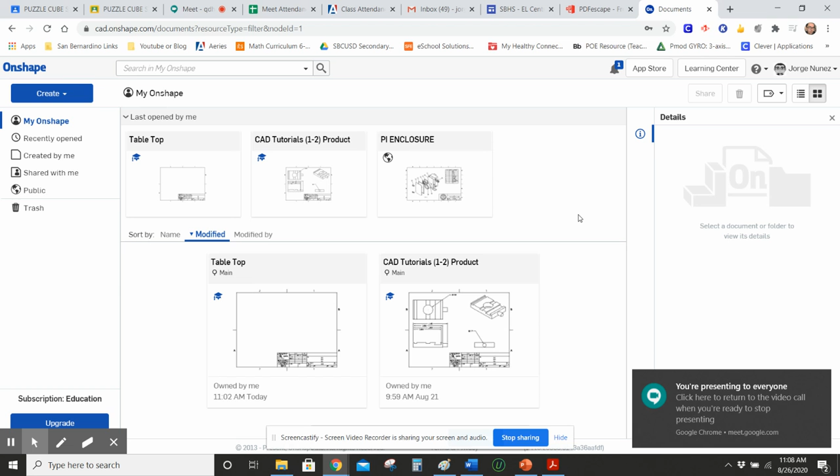I'm going to go to create document, and call that document toy. Inside of this toy, we're going to have a bunch of different part files. So let me create the first part, which I'm going to be sketching. I'm going to do it on the front view, right click and select view normal to, select the sketch, and have the front view be the sketch plane which is already there ready for me. The first thing I want to do is just make a simple rectangle.

I'm going to make a rectangle corner to corner. Doesn't really matter where you drop it right now because we can dimension it later. If I click on the dimension tool, the top side of this rectangle I'm going to make 4 inches, and the left side of this rectangle I'm going to make 2 inches. There we go, so there is my first little part.

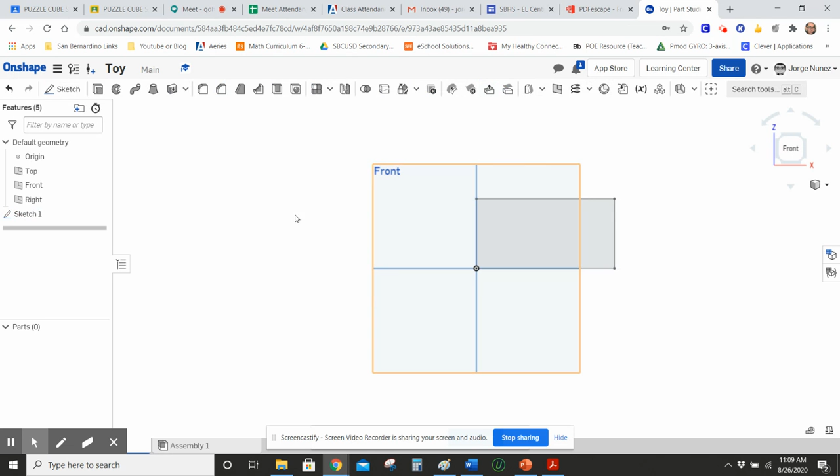I'm going to finish the sketch, and then extrude this by selecting that face. Let me show you guys the isometric view. The amount I'm going to extrude is 0.5 inches. Okay, so there we go, first piece is already done.

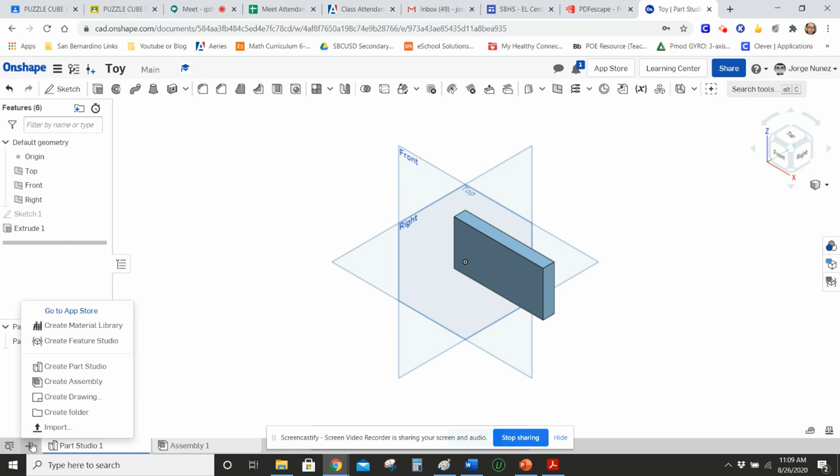Now let me create a second piece. On the bottom left-hand corner, I'm going to select the plus sign again, create another part studio. Same exact thing - I'm going to select my front view and draw on it, select view normal to, and sketch on that front view which looks like it already did it for me.

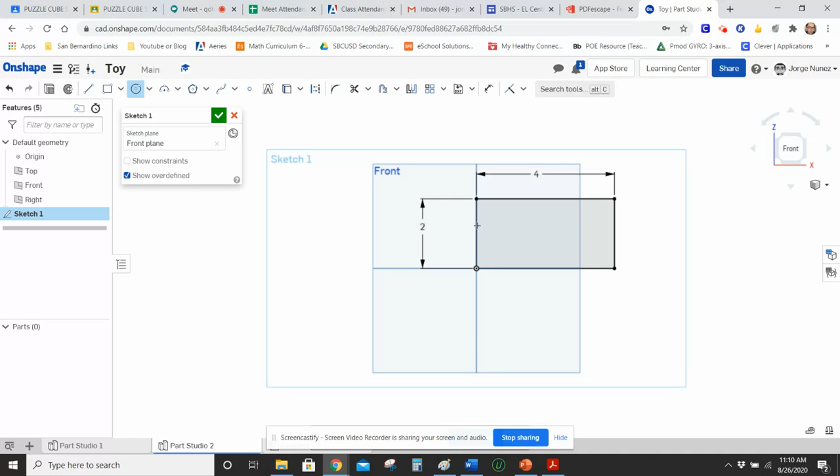I'm going to make another rectangle, same thing I did last time, starting at the origin. You can worry about the dimensions later. I'm going to make the top one again 4 inches, and the left side again 2 inches. Oops, I don't think I liked it. There we go. The only thing I'm going to make different this time is I'm going to make a little hole in the middle.

So I'm going to make a circle with a hole in the middle, and make that diameter 1 inch. I'm going to change the diameter of that to be exactly 1 inch, and now I have a hole in the middle.

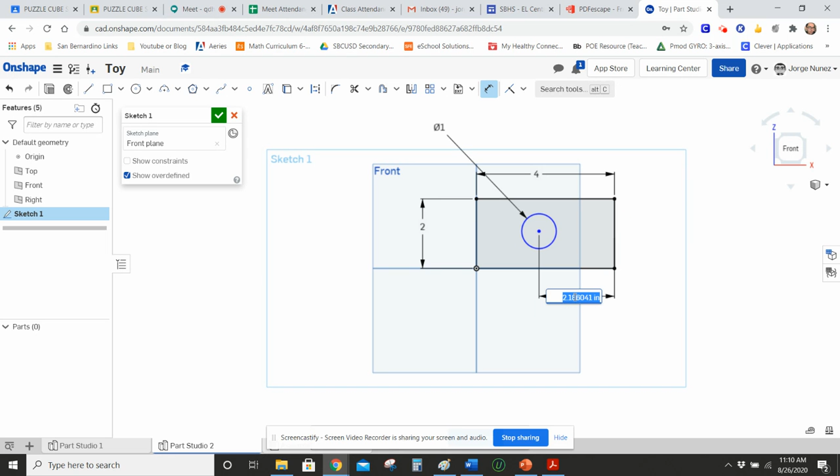I'm not done yet though, because I want to put that hole exactly in the center. So the next thing I'm going to dimension is from the center of the circle to the edge - let me try that again - from the center of the circle to the edge, I'm going to make that exactly 2, half of 4, which is 2 inches. Then from the center of the circle to the top, let me try it again, I'm going to make that half of 2, which is 1 inch. Since I did half of 4 and half of 2, that hole will now be exactly in the middle.

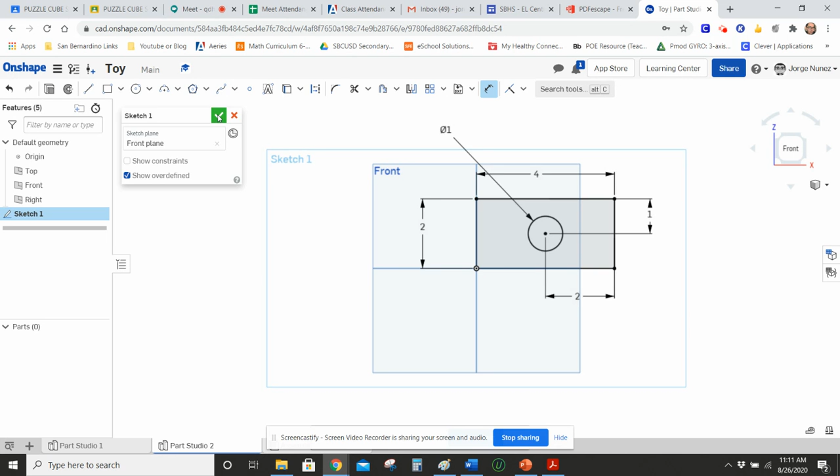I'm going to finish my sketch and extrude it, only extruding the part that's on the outside, and make that again half an inch or 0.5 inches. Select OK. I'm going to show you the isometric view so you guys can see - now we have this shape, this piece.

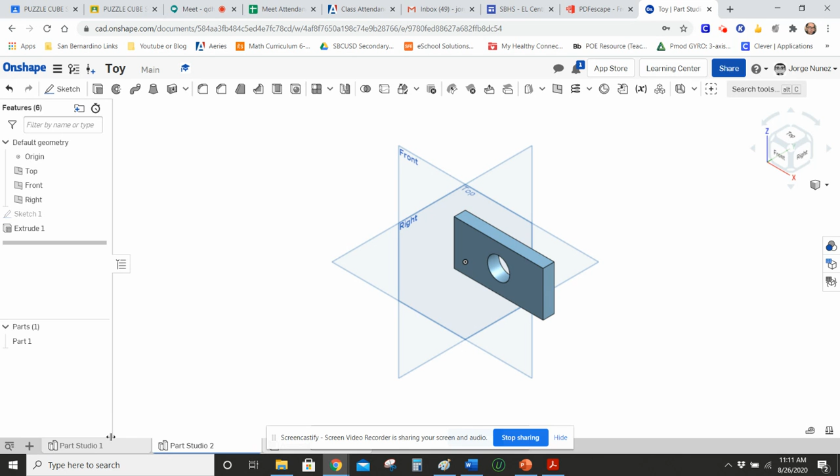The final piece that we're going to make is the easy one. I'm going to click on the plus sign, create part studio, and then what we're going to make is a peg. Anywhere you like - I like putting it on the front, but it doesn't really matter. I'm going to create a sketch on that front view. All we're really going to do is create a circle and extrude it, so this is going to be a really easy one.

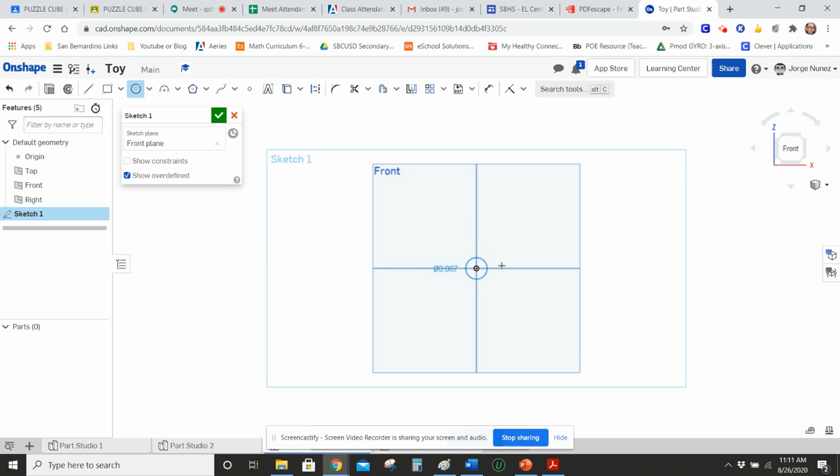That circle will be a diameter of 1, so I'm going to dimension this to be exactly 1 inch. Finish that, and then I'm going to extrude that, and the amount I'm going to extrude it outwards will actually be 4 inches. So this is going to be sticking out quite a bit - this is going to be a peg that is sticking out of your toy. Okay, so there we go.

We have 3 different pieces for our toy, and now the next step is we're going to have to assemble this toy within Onshape. I'm going to finish this video, and then make the other one in part 2 because I only have a 5-minute limit.

All right. Notice that anytime you guys have, oh wait,